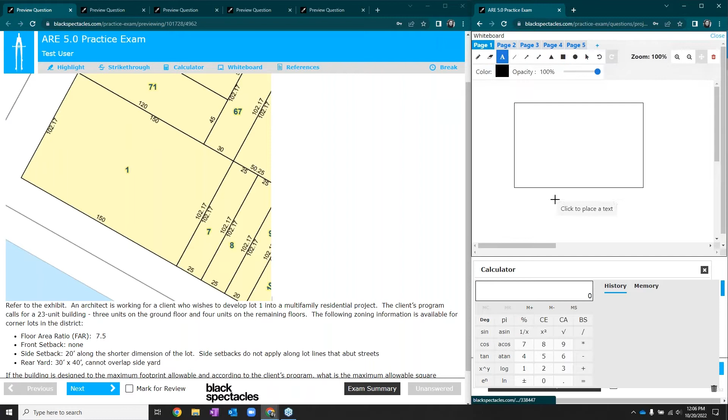And I'm going to go ahead and put a couple numbers in here just so I can kind of keep track of it. So 150 — we're just going to assume that means feet. And then 102.17.

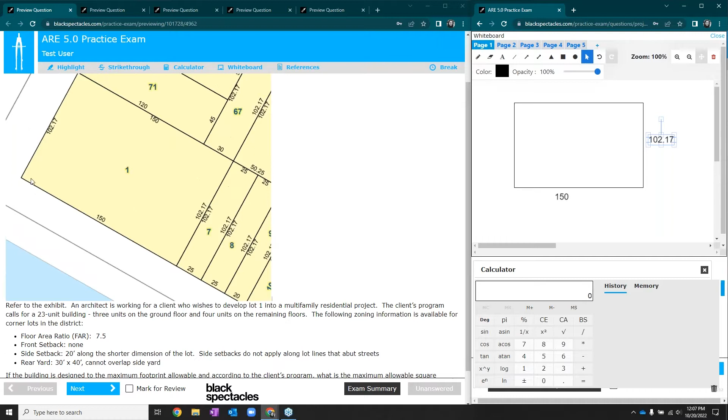All right, and so now let's take a look at our setbacks here. So front setback is none, so these front setbacks are going to be the ones that are on the streets here. So these are going to be able to build all the way to the edge of the lot. All right, then it says the side setback is 20 feet along the shorter dimension of the lot.

So this is the shorter dimension, so let's take off 20 feet there. I'm going to draw a little dash line here and boom, we'll label that 20 so we know how wide that is. Okay, so these tools are a little tricky and I can't get through without messing some of them up, but that's okay, don't get frustrated. You can always right click and remove something if you accidentally drew something you didn't mean to. Pretty forgiving, all said.

All right, next we need to have a rear yard. So the rear yard has to be 30 by 40 and it cannot overlap a side yard. So we have to make sure that this is its own thing, the side yard, and then we need to draw a 30 by 40 here. All right, so close enough. We'll type in 30 by 40 so we know what we're doing. All right, so that's basically the buildable area, all of this in here.

And so what we're going to do is very quickly calculate what this area is. We know it's going to be 150 minus 20 on this dimension, so we can do that in our heads — that's 130. And then we know that this dimension is going to be 102.17. So what I would do is calculate the area of this rectangle and then subtract that other rectangle out of it instead of doing something more complicated.

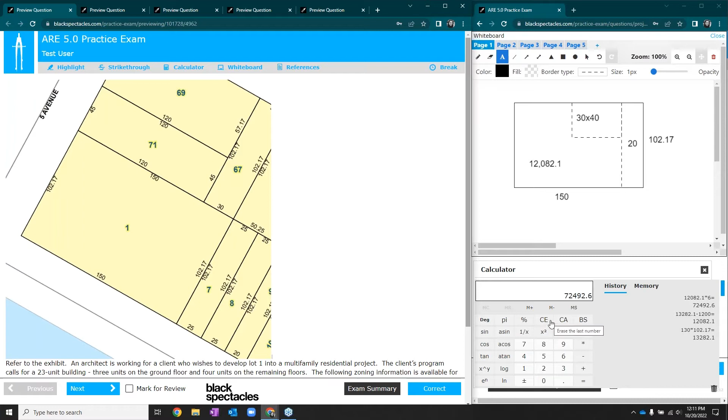The other thing I would say here is this question, which is pretty similar to one of NCARB's questions in their recently released practice exams, requires you to consider the maximum size of the building based on the client's program and not necessarily based on the FAR. If you just use the FAR to answer this question, you'll come up with a higher number and you'll get the answer incorrect. So don't—I think this scenario is somewhat unrealistic in real life.

If you're working with developers, they're most likely going to want to build the biggest building allowable, but don't apply that outside information to a question like this. If you've got specific information about what the client's looking for, and the question specifically asks you to consider that in the answer, go with that. Don't apply some outside information.

With that, we're going to move on to question 2, and we're actually going to do this question a little bit differently. We've heard some feedback from you guys in the past that you want to see us go through questions faster, kind of like game speed on the ARE. So Haley's going to go through this question pretty quickly. No pressure, Haley.

So I just started my timer. Haley, go for it. Oh gosh, okay. All right, so starting at the end, what should the client's budget be rounded to the nearest $1,000? Okay, proposed program, got a bunch of spaces here with a bunch of square footages.

Refer to the exhibit. An architect is reviewing a proposed contract with a new client and wants to verify if their budget is in line with the architect's experience on recently completed projects. The architect completed a municipal building for a neighboring town 2 years ago, and construction costs totaled $425 per square foot. That project, however, didn't contain a kitchen, which the architect estimates should cost $500 per square foot. The architect researched inflation and found that construction costs rose 3% per year since the project was completed.

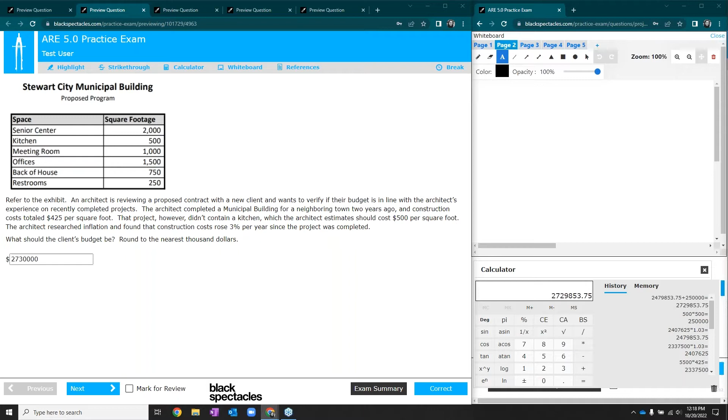Yeah, I think that comes in handy if you're calculating for, say, 10 years of inflation. You might not want to waste time on the exam typing out the number 10 different times. So if you're comfortable with it, I would certainly consider that trick. And I hope you guys appreciated us going through this one at game speed. If you did, let us know, and we're happy to do this for a question or two on future ARE Lives as well. With that, let's move on to question 3, and we're going to revert back to a little bit of a slower pace to really explain all of these concepts.

Okay, cool. So third question. Let's go to the bottom here. How many parking spaces should be provided? Okay, and so going back up to the top, I see a very familiar table to me.

If this isn't familiar to you, it might be a good one to take a peek at. This is table 1004.5, and it has a whole bunch of information about occupant loads for different types of spaces. So refer to the exhibit.

An architect is designing a new student housing building for a small college, and the building will contain the following: 50 dorm rooms at 200 square feet each, a dining hall that can accommodate 75% of the capacity of the dormitory, a 2,000 square foot kitchen, and a 3,965 square foot gym with a 500 square foot locker room.

The local zoning ordinance requires 1 parking space per 6 occupants as defined by the 2018 IBC table 1004.5, which they've conveniently handed us. So how many parking spaces should be provided?

To me, this looks like we need to figure out how many occupants there are and then calculate the parking based on how many occupants we calculate for each type of space. So let's start at the top and calculate the occupancy for all the program here.

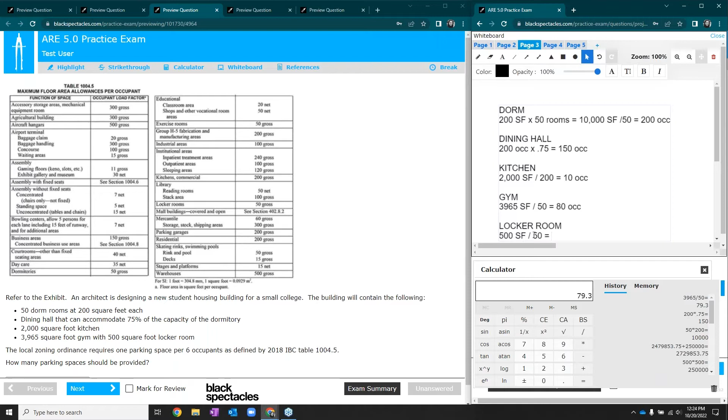Okay, great. All right, so we've got all of the occupancy numbers here. Now what we need to do is figure out the total occupancy and then figure out the parking based on the total occupancy.

I'm just going to use the calculator for the rest of this question. We're going to take all of these individually calculated occupancies and add them up. So 200 plus 150 plus 10 plus 80 plus another 10, that gives us a total of 450 occupants. Since we know that we need one parking space for every 6 occupants, we're just going to take this total number and divide it by 6, and that gives us 75 parking spaces that we need.

I'm really glad you tripped up on the gym versus exercise room, because that's a really good point to make - you need to become familiar with this table and the words used in it. I think also when you see student housing, you need to know that means dormitories. The first bullet point uses the word dorm, so that's a clue, but you definitely need to be comfortable with the verbiage that might be used to describe some of these spaces that could differ from what's actually in the table.

The other thing we should talk about is the rounding for the gym. I would say for the ARE, I would always err on the side of caution, just like Hayley did, and round any occupant loads up. Even if it's 79.01, I would round it up. I know in reality, if you're working with a building code official and it comes out to a number like that, maybe they'll let you round down, but for the sake of the ARE, I would always round occupant load up. It's the more conservative approach. One occupant usually doesn't have a huge effect on things when you're designing a building, so it's just best practice to do that.

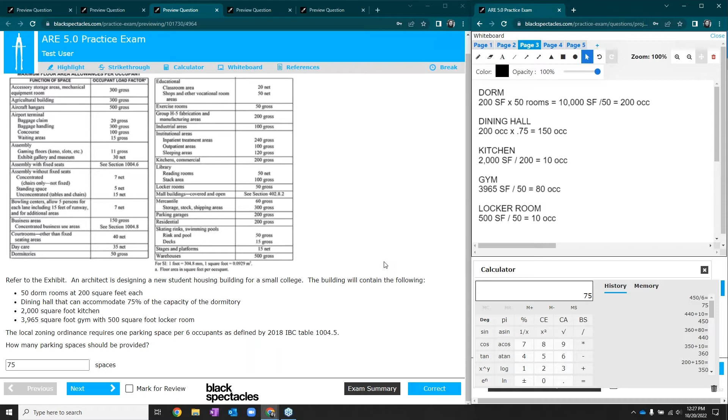I think otherwise this is a relatively straightforward multi-step math problem. But I would certainly recommend, at least for PPD and PDD and maybe even PA, getting familiar with this building code table and making sure you're comfortable using it on the ARE. Yeah, so don't do a podcast and forget how to read a table.

That's another good point. I think with that we can move on to question 4. Awesome, okay, let me get my calculator cleared out. I've got a new whiteboard page, and let's check out this question.

All right, so refer to the exhibit. An architect is comparing 4 different options for waterproofing of an exterior wall system. The total wall area to be covered is 4,000 square feet. The architect wants to evaluate the 4 options based on a 25-year life expectancy to determine the most cost-effective product. So which product offers the lowest cost over a 25-year lifespan?

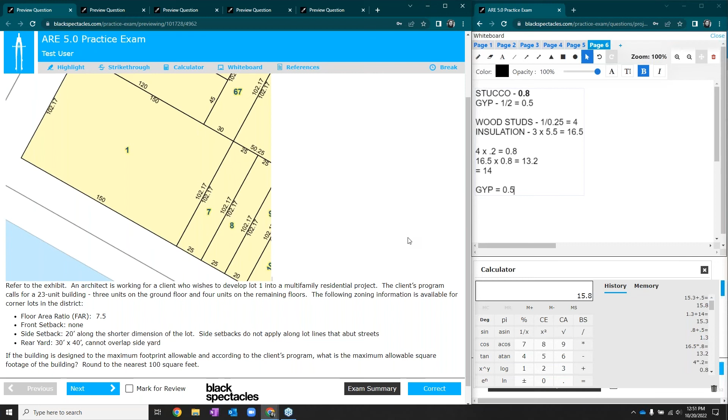The question is, since the first question is asking for the maximum allowable square footage, shouldn't we only account for the FAR? Had the question asked for the total square footage, then the setbacks and number of stories would come into account. What I would say about this one is I agree the wording of this question is confusing, and I assure you that I'm not trying to be confusing just for the sake of it.

There's a question on the NCARB PA exam, question number 3, that has a really similar concept to it, where the answer requires you to take into account what the client wants to build and not just what the FAR would allow. And like I said when we were talking about this question, I agree that's not reality. Most, if not all, developers are going to build the biggest building possible.

But you've got to sort of step out of that mindset on the exam itself and really answer the question. So reading this question super specifically and slowly: if the building is designed to the maximum footprint allowable and according to the client's program, what's the maximum allowable square footage of the building? So the 'according to the client's program' that Hayley highlighted there is really the operative term.

And perhaps this could have asked what's the resultant square footage of the building. Again, I included maximum allowable because that's the wording used on the NCARB exam. We really study everything that NCARB puts out there so that we understand how they're asking questions and we can best prepare you all for this exam. And that's where this question came from.

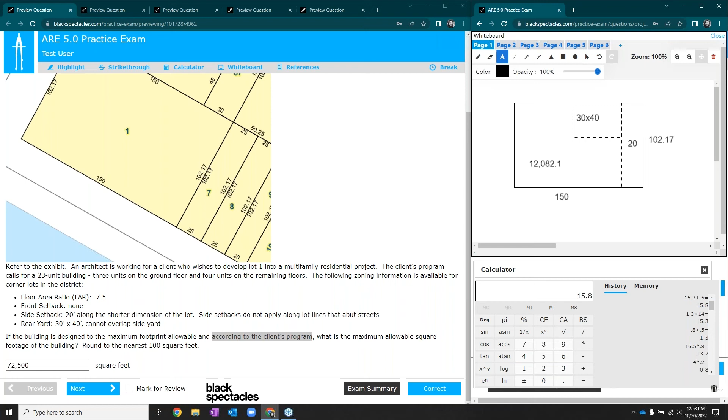So with that, can you go to question 2 for a second? I don't think we had any questions about this one, so let's move on to number 3.

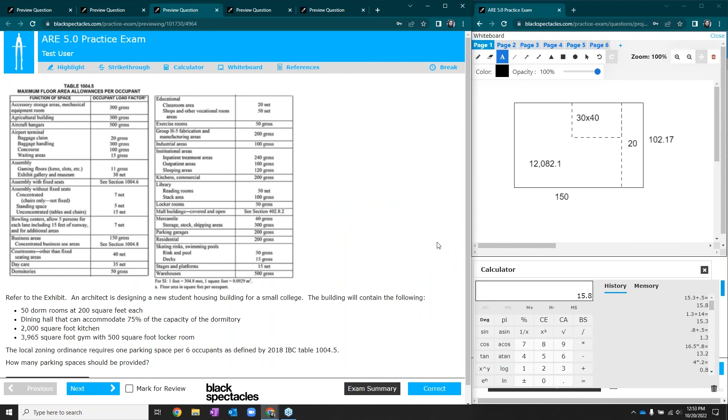The question is, and I'll pass this one over to you, Hayley: how would you know to use exercise room versus assembly space without fixed seating factor? At my firm, we calculate gyms with the assembly without fixed seating factor. Is this just an NCARB thing?

I totally get what you're saying, but the whole idea is that people are exercising in these rooms and it's not all meant for people assembling. I think that 'exercise room' is a good way to think about this. Another way this question might have been worded to avoid that would have been 'square foot workout facility' or something like that, so there wasn't an implied assembly type nature to it.

I mean, gym can mean a whole host of things. It can mean a basketball court with a whole bunch of bleachers. It could mean any number of things. But in this situation, we went with exercise rooms. If you're more familiar with the program outside of a single word, you could be better able to make that judgment call. So it very well could be an assembly space in some situations, but as for what we were given in this brief word 'gym,' and we had an exercise room as an option, I think that was a good choice.

I agree, and I think this person might be practicing in New York City, because that is how you do it there, it's 15 net square feet per occupant in a gym. But I agree with what you said, Hayley. I think the closest thing here to the word gym is exercise room. I think there would be better clues if you needed to use the assembly portion of it on an NCARB question. It's kind of unfair if they don't give you that information or hint you better to use the assembly designation. So I agree, this one's a little tricky, but I think the best answer here is certainly exercise room. That was a great question.

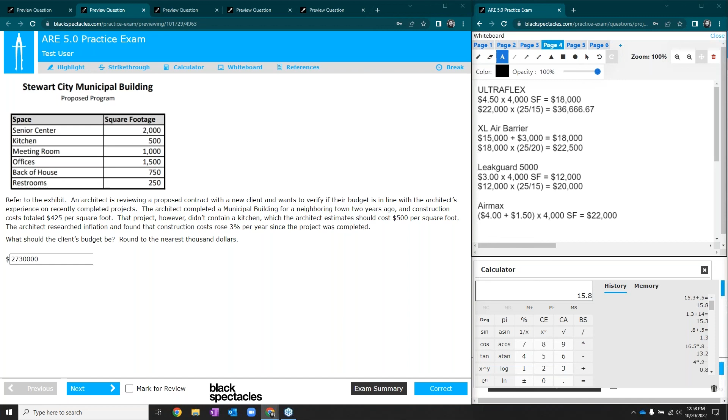Let's go to the question with the occupancy load chart. Hayley, if you could answer this one - somebody's asking if you can clarify the difference between net and gross square footage for the occupant load.

I'm awful at this. So I think that has to do with where you determine the square footage as far as the wall. I'm not going to be able to get this right - I'm being put on the spot about something I have to look up every time. I'm going to be real with you, I have to look this up every time.

No worries, it is confusing. Net square footage - let's look at some examples. Classroom is 20 net, daycare is 35 net, bowling centers - it's all these kinds of spaces where the activity doesn't take up the whole space. It would be unfair to apply that low number of occupants per square foot to the entire facility - you've got the area where you get the bowling balls, the front desk, circulation space. So you apply net square footage just to the areas where you're actually using the space for its intended purpose.